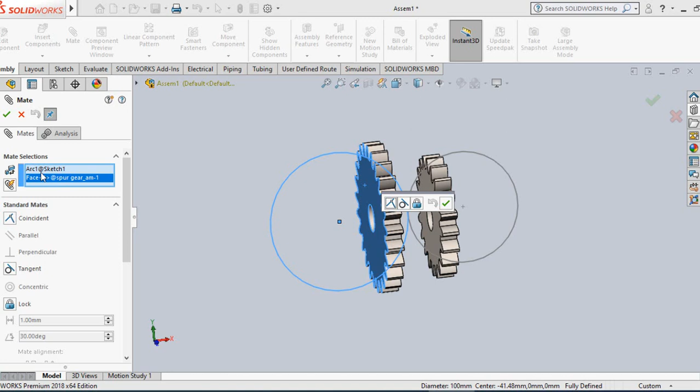Now how should they be in the same plane? I know that I drew these two circles in the front plane. So what I'm gonna do is select the first face and go here, select the front plane. Why is it not working? Because in fact, this is the first gear, and the first gear is always fixed as the first component in mates. So that's why I'm gonna float it now.

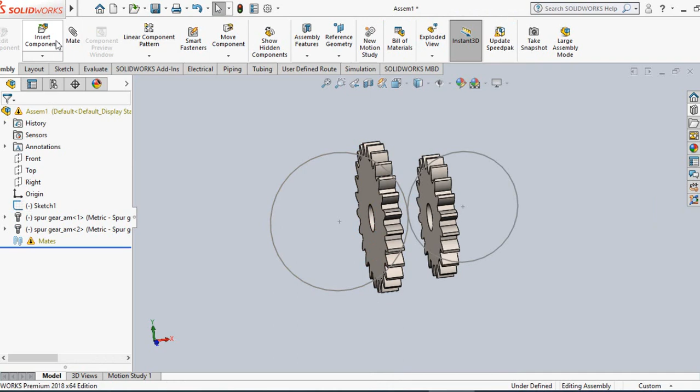Then I'm gonna go back to mate, select the front plane and the face, and now it will turn and they will be coincident. Then I'm gonna click OK, and do the same for the second gear, selecting this gear with the front plane, then click OK.

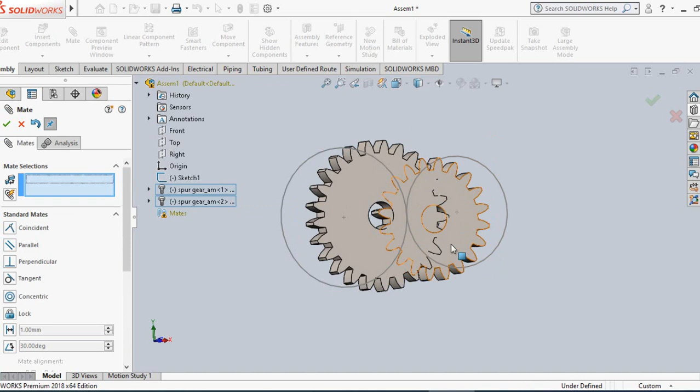Alright guys, so now they are in the front plane, both of them. Now what I'm gonna do is select this circle here.

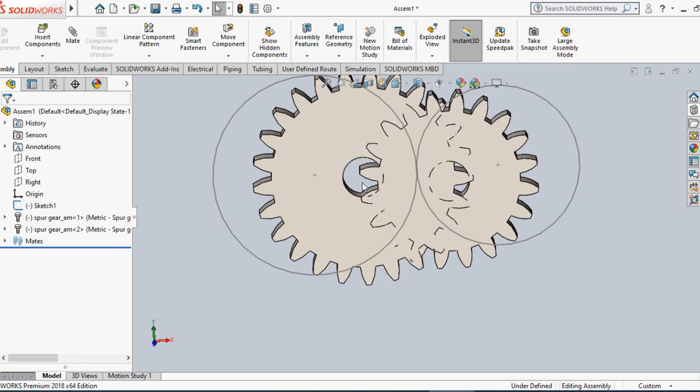So let's make this circle concentric with the circle. I'm gonna click OK and do the same for the second gear. So now, guys, they are concentric with their pitch circle.

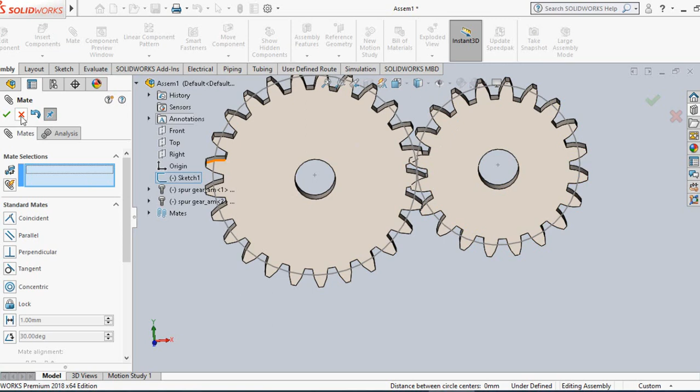Now I'm gonna close the mate and adjust the teeth so that they fit properly. First, let's go to front, click on normal to, zoom in, and rotate the second gear so the teeth are not in contact, leaving some clearance between them. Now I'm sure they could be in meshing before doing the advanced mate.

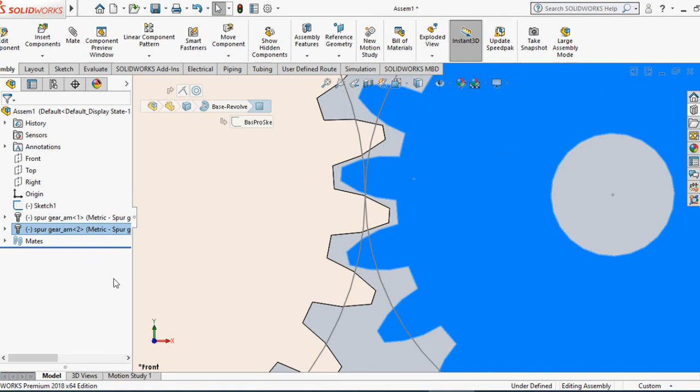As you can see, this is the pitch circle, and these two pitch circles are tangent. Now what I'm gonna do is go to this mate.

So let's go to mate, go to the mechanical mates, and select the gears. Whenever you select the gears, you have to make some selections. What you have to do in the mate selections for gear is select the shaft circle for both gears. So this is the first circle and this is the second circle.

Automatically, SolidWorks will take the diameter of these two shaft circles, but this is not, in fact, the velocity ratio. I know the velocity ratio is d over d, the diameter over the diameter, or omega over omega, or the radius over the radius, or the number of teeth over the number of teeth. So, in fact, I should adjust it.

What is the ratio here? It's the first diameter over the second diameter. If you want a reverse or opposite velocity ratio, 80 over 100, you have to select reverse. It depends on what you select first. So if you select the circle first, you have to put 100 over 80. If you select the circle here, you put 80 over 100, or you can put 100 over 80 and then click reverse.

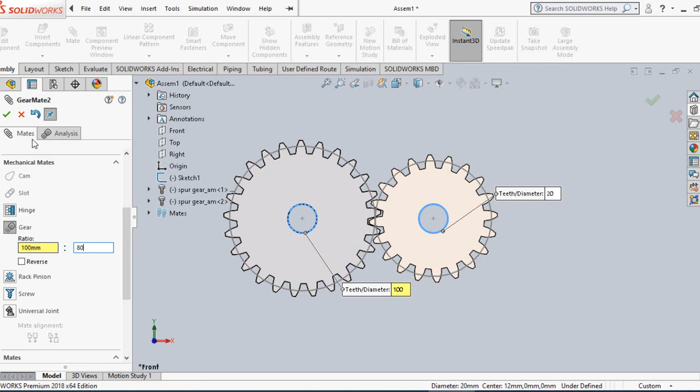So I'm gonna click OK now, click reverse, and as you can see, if you rotate the first circle, the second circle will rotate in opposite direction while keeping the meshing.

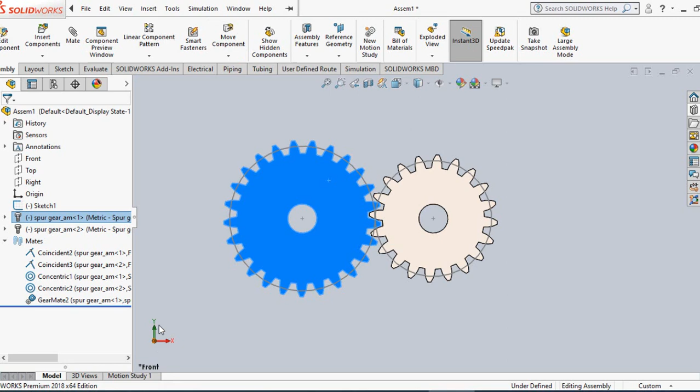Guys, if the module is not correct, I'm gonna show you how — if the module was not the same, you will not have meshing gears. So if you go here, edit the toolbox component, edit the module, and make it different from the first module, for example 2, then click OK.

First, they will not be engaged because the pitch circles are not tangent, and second, you're not gonna have meshing gears. So I'm gonna readjust it again.

So it's 4. And click OK. Now what if, guys, in your gear mate, you did not put the velocity ratio as it should be? Let's try it.

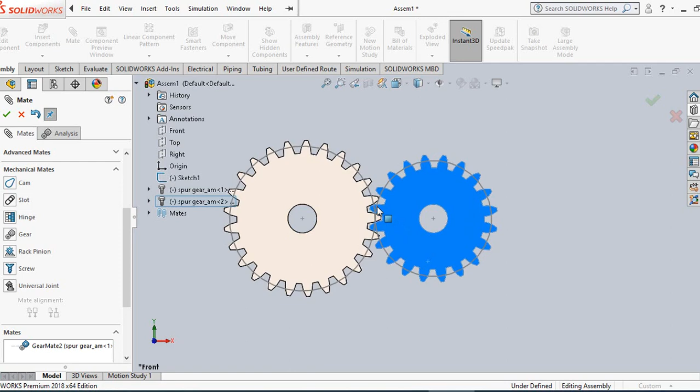Let's make it 100 over 50. In this case, guys, you're gonna have non-meshing. So if you rotate this one, as you can see, the teeth are not engaged together, so there will not be any meshing. That's why I have to make sure the velocity ratio is correct.

So I'm gonna go here, edit feature, and put it 100/80, then click OK. And as you can see, if you rotate the first one, the second one will rotate in matching. So the gears are now engaged.

Now, if I want to save it as an animation, I should use what is called motion analysis, and this is the third part of the course. How to do the motion analysis? You have to make sure you have meshed, engaged gears, and then go to motion study here. Whenever you click on it, you can put a motor.

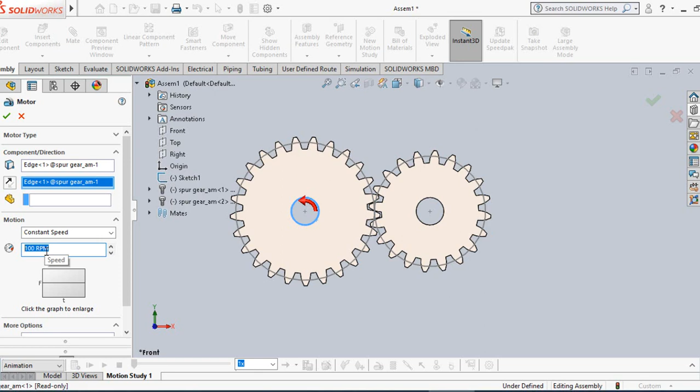Did you see this motor? So you can put a motor, let's say on the input shaft. Let's say the input shaft is on the largest gear. So you can click on this one and specify the angular velocity you want. Now here we have 100 RPM, let's keep it at 100 RPM. Then you click OK.

You click here, calculate. And then you can save your animation, save animation. I'm gonna save it on the desktop and show you how it works.

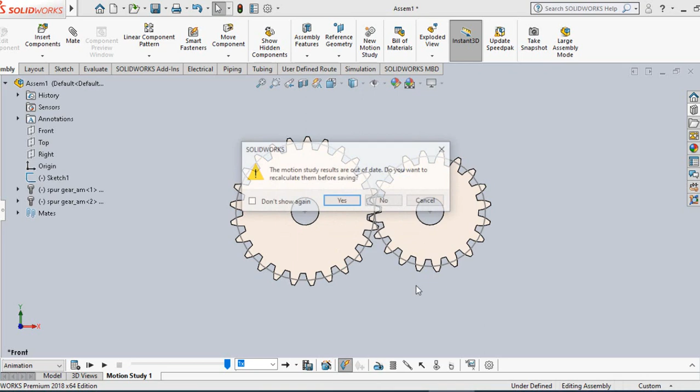And I'm gonna call it simple gears assembly. Then I'm gonna click OK, then click yes.